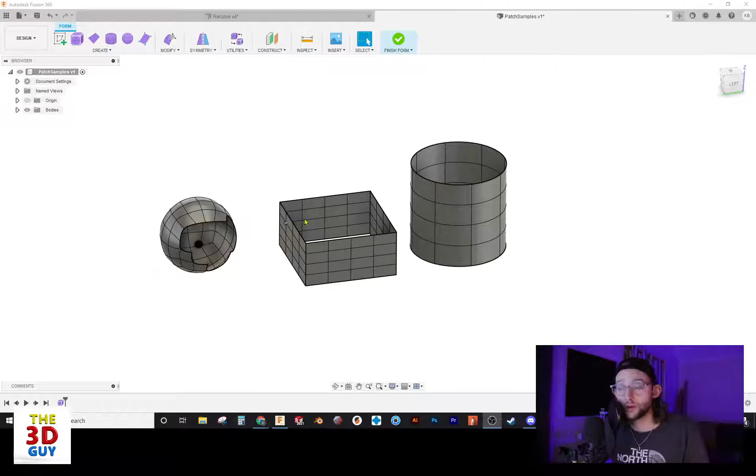We're in the build space for forms, and we're actually going to be talking about how to fill holes. In Fusion, I've already built these three shapes: a nice cylinder, a cube, and a sphere. As you can see, they have holes in them, or a bite taken out of it.

So we're going to go to Modify, drop it down, and click on Fill Hole. With Fill Hole, the first prompt you're going to get is to click on an edge, a T-spline edge specifically, and there you have it - it's going to cap it off.

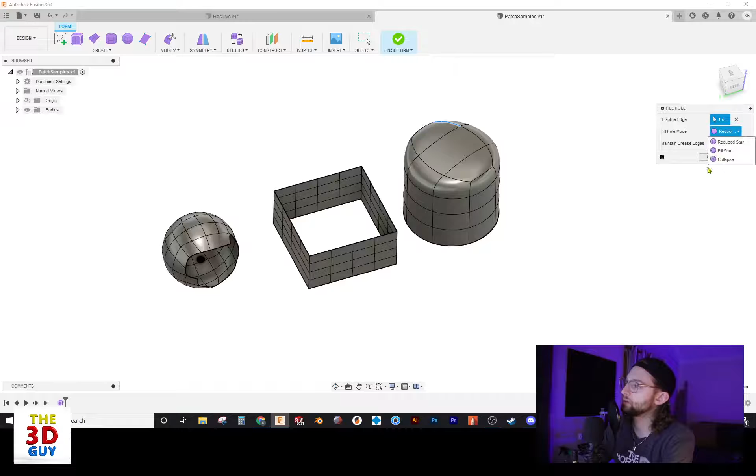Though we see that there are different options. There are three different options, as well as this Maintain Crease Edge, which gives you that sharp edge. It keeps that edge, which is nice. So reduced star, we also have a fill star, which almost looks like a puckering of a tube and then capping it. And then last we have a collapse, where everything just focuses down into a center point and looks quite nice. We'll go on to the next one, and then I'll talk about what Autodesk talks about.

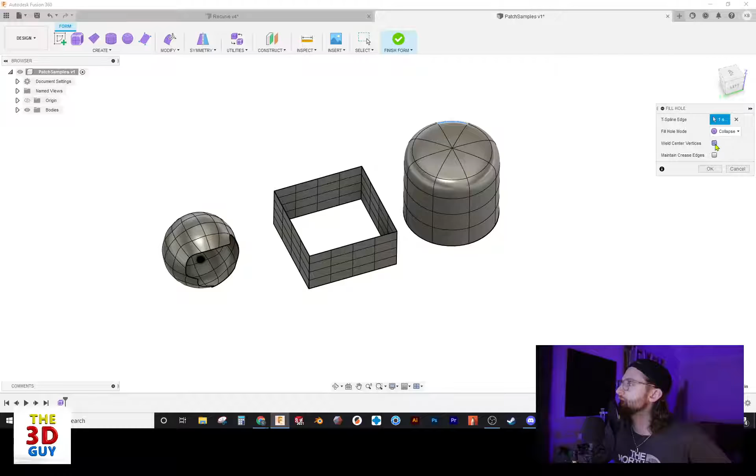You also have this last option right here, which is the weld center vertices, which really just kind of raises that corner a little bit and makes it a little bit tighter. So we'll just leave it like that and call it good.

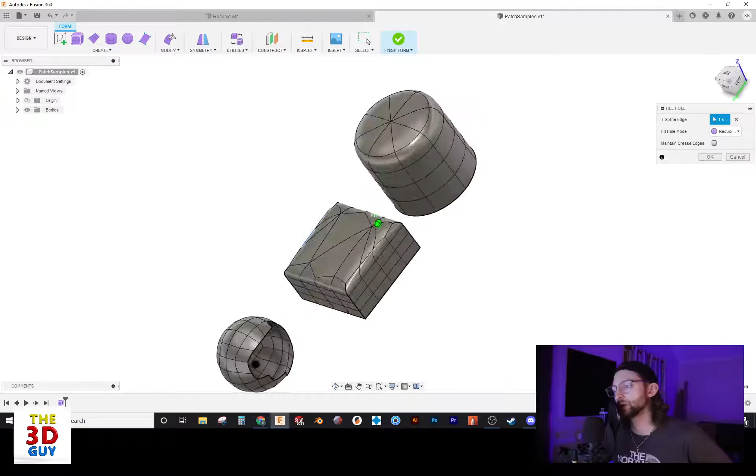All right, so next what we have is the box. With the box, we're going to start with reduced star. Click on an edge, and there it goes. It's just kind of crazy, it looks really kind of weird. Typically, you can see as in this instance, it's almost symmetrical, which is usually what will happen with reduced stars. It'll keep a line of symmetry, which is nice.

If you were to keep the edge, it just keeps it back into a square, but has kind of this weird lines going all over the place. Not a big fan of that, but you may be working on a project that you want that randomized.

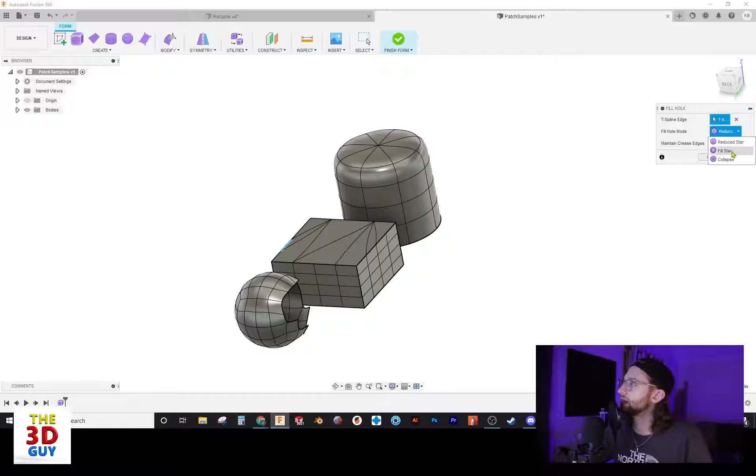Next you also have the fill star - let's uncheck the maintain crease, and again you're getting that puckering, which is kind of nice with that cap star in the middle. Last but not least, the collapsed, which is just like the cylinder - it's going to the center point. Same thing with the welding, as it kind of brings up that edge.

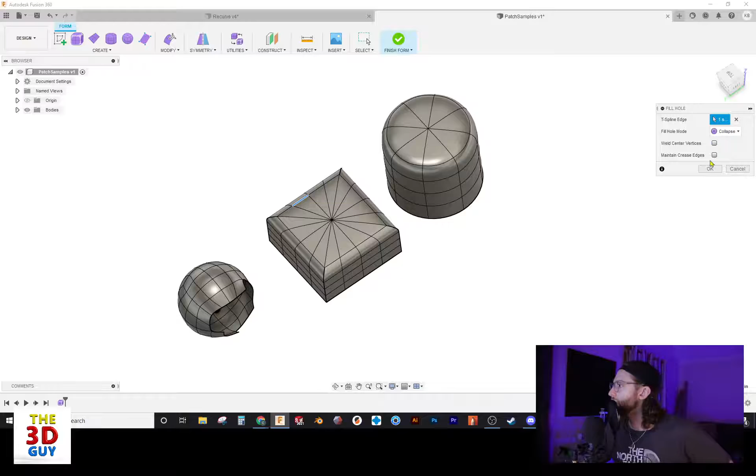All right, let's move back to that one and leave that. All right, last but not least, we have the sphere - not a cylinder. Spheres are kind of weird, especially in this case where I've cut out a very weird shape.

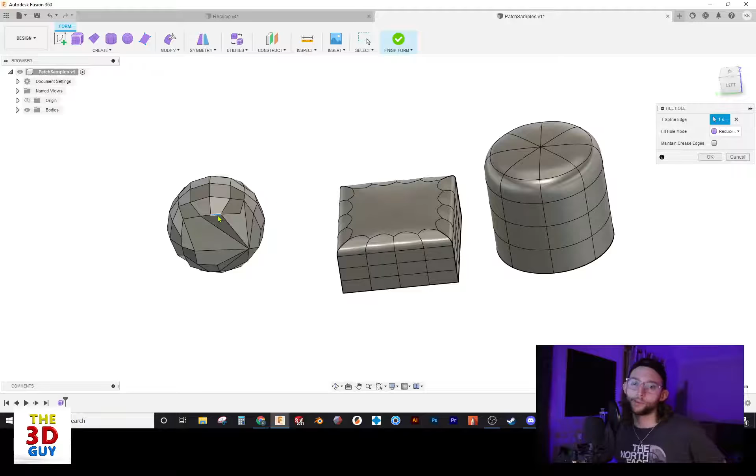So let's go to reduced star and see what happens. Boom, disco ball. I don't really know why it does that, honestly. Yeah, so probably not desirable.

If you maintain the crease, it doesn't make a difference. Same with the fill star, does the same thing. It does look like it smooths out that patch a little bit better, and then again, if you maintain the edge, doesn't do anything.

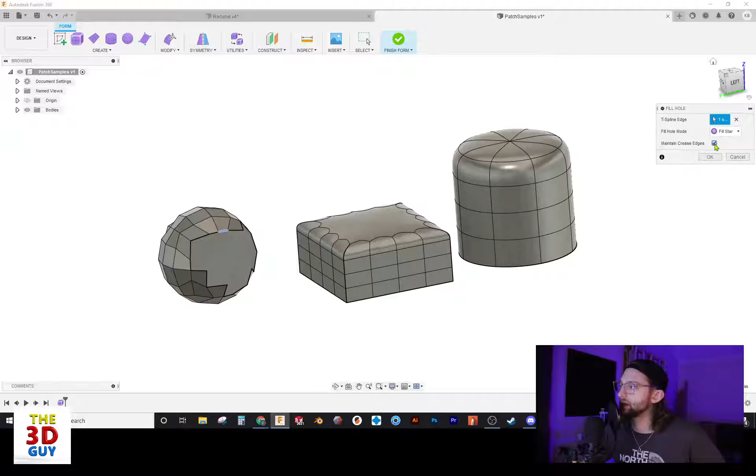Last though you do have is the collapse, which does work. So something to keep in mind is if you are working with a sphere, this would be your best option. Again, it's because it's puckering to one point. I think it just kind of blends in a lot easier by doing so.

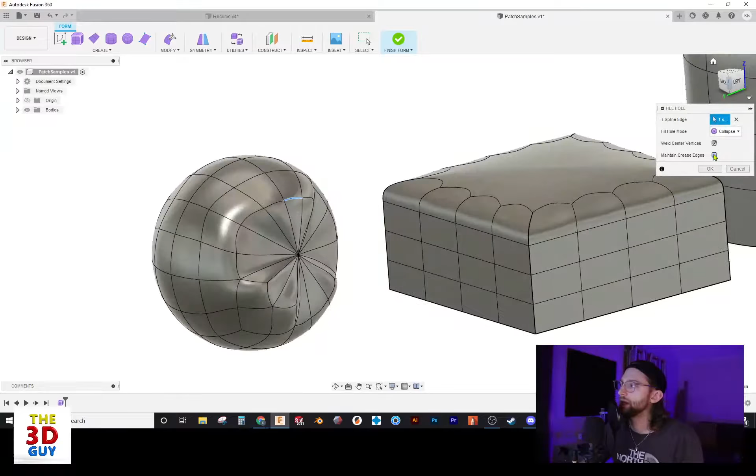If you do hold on to the weld vertices, again, it's going to kind of lift up and make those edges a little sharper. And then if you keep that edge, it's going to do the exact same thing - it's going to look a lot more crisp, as it has with all the other features.

Anyways, that is it. I'm going to real quick go over a comment from Autodesk actually about this feature. It does suggest that you use the fill star mode, as it is minimal distortion for the shape, but if you want to maintain symmetry, you'll need to use the reduced star. I think there are some exceptions to that, as you may have seen in this video, but those are some things to keep in mind that come from Autodesk themselves.